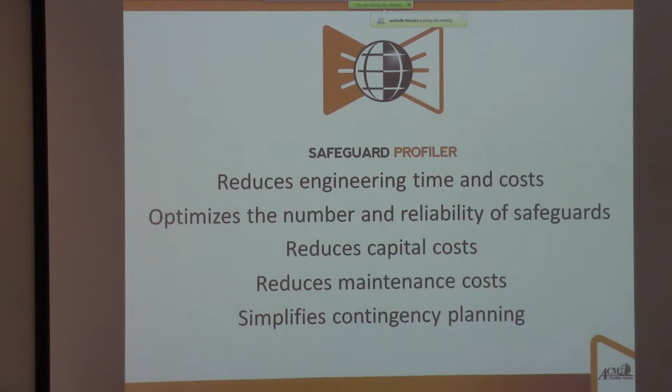SafeGuard Profiler is available in a few different packages. We've got the LoPA package, a SIL verification package, and an expert package. Today we're only really going to be talking about the layer of protection analysis side. It's a SIL determination step.

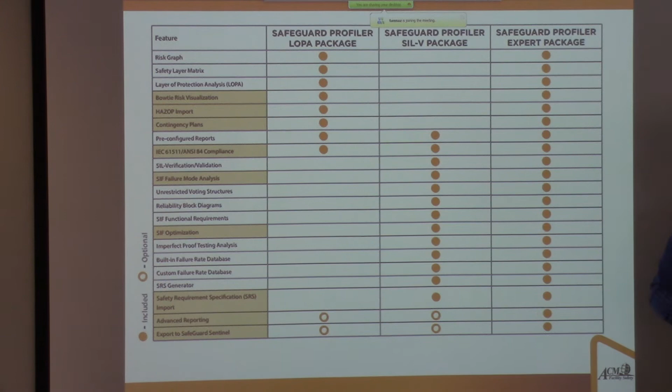So if we're talking about the layer of protection analysis and how we get there from the Hazop, what we're going to do here is set the stage and look at an example that hopefully most of us can relate to, which is a crude distillation unit. I'm going to walk you through what we would actually do in a Hazop. Most of you have participated, but a little bit of a reminder so that we're really setting the stage for this LoPA.

I'm then going to introduce what LoPA is, what the concepts behind it are, and we're going to walk through that same Hazop with the LoPA and talk about risk visualization, which is one of the things Profiler really specializes in, to make the sessions easy to understand and clear, and make it clear what the importance of the session is for everyone involved. Ultimately, I'm going to show you how SafeGuard Profiler does things better than the software you may have used in the past for your LoPAs, whether that be spreadsheets or PHA Pro.

Actually, that's another good question. Those of you who have participated in LoPAs, how many of you know if it was done in PHA Pro? Hands? How about SafeGuard Profiler? None. Okay, well that's good. How about Excel? How many of you have done them in Excel? Any other tools? Yes, we haven't shown SIF Pro. SIF Pro, of course. We also have Thesis, Thesis, which I would not recommend for doing LoPA. Well, we'll be looking at a lot of those today to compare them to what you get, especially PHA Pro in particular.

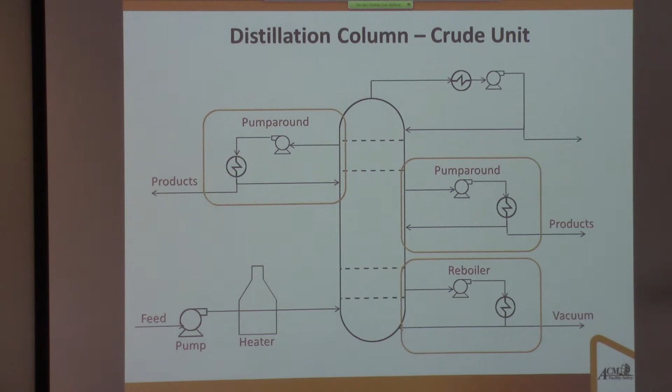And the way the crude unit works - it's a really simplified one - you have feed coming in, it's pumped through a heater to get it nice and hot, at which point it goes up the column. At the bottom here we have a reboiler, and that heats some of it up, sends it further back up, and draws some of it off as a vacuum feed for further processing. Also going up the column are various pump arounds that help you make products you'd be familiar with: kerosene, gasoline, jet fuel. Depending on how many pump arounds they have, they can get different products out of it. And ultimately we have the overheads, the really light ends, the propanes, etc., that are going to come off at the top.

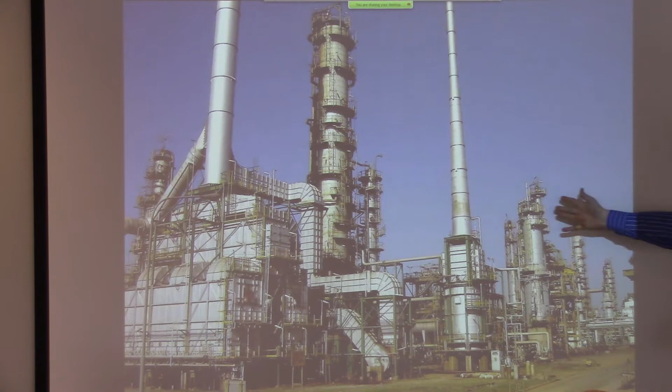So we have this nice, pretty crude unit. We've spent billions of dollars building it. And what we're looking at in the Hazop is what could actually go wrong. So we've got this crude unit - what's the worst thing that can happen? Anyone? Fire, explosion. Fire, explosion, that's a good one. Absolutely, it happens relatively often in industry that something goes really severely wrong with these and they blow up. What we're trying to do in the Hazop is identify that risk exists, identify what causes it, risk rank it, and identify what safeguards we have.

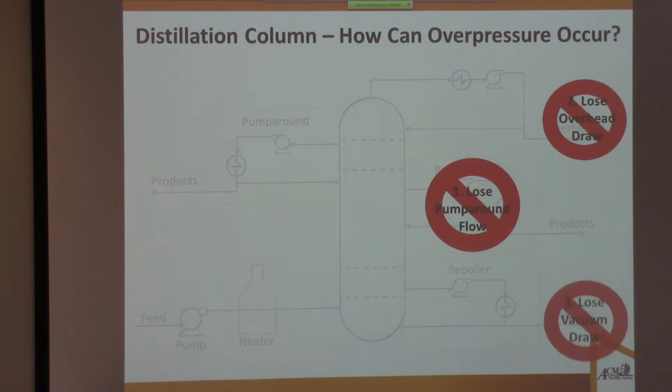So one way that we can blow this place up is overpressure. We're going to ask the team in the Hazop, all right, on this drawing that we're looking at, how can overpressure occur? Normally we're looking at very specific things like valves failing, equipment failing, operator issues, fatigue, etc. Some examples we have here that are pretty high level: things like losing your pump around flow can overpressure this thing, losing your overhead draw can overpressure it, losing your vacuum draw, losing temperature control in a pump around, and a line break in the reboiler. There's lots of different things that can all lead to the overpressure of this crude unit. We're trying to identify those here.

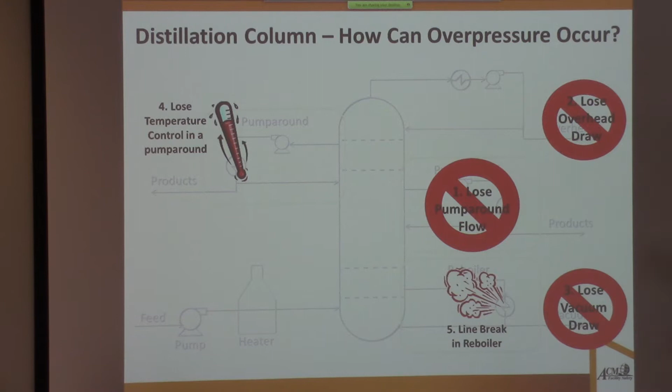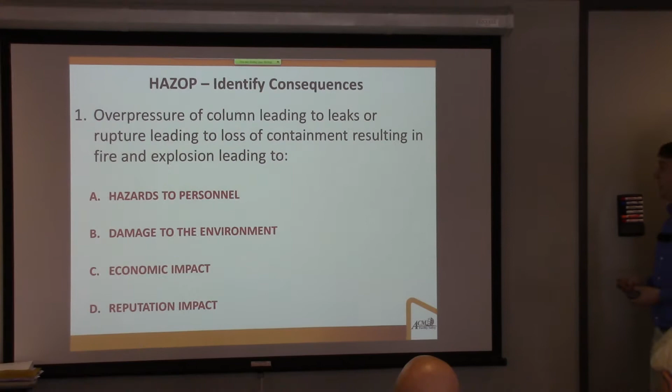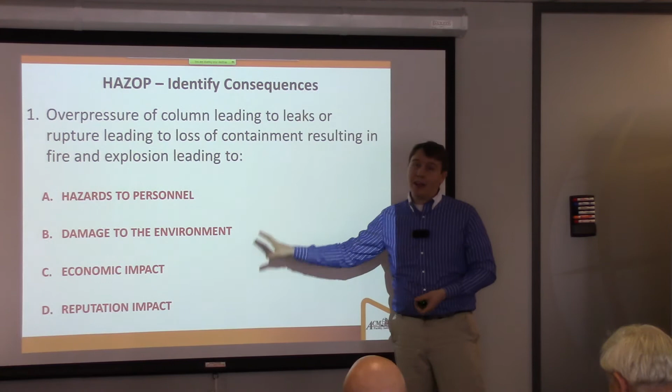Now, if I was going to walk you through a Hazop, we would actually go through each and every cause. But because we're limited on time and I want to talk about LoPA, let's look at just one of them: losing pump around flow. So we said that's going to cause overpressure, that's going to cause a fire and explosion. What is ultimately the consequence of that? There's various different impacts that can occur - ones we like to look at in particular: hazards to personnel, damage to the environment, economic impact, and reputation impact. They're fairly standard. Depending on what your company does, you may have more, you may have fewer, but really everything's going to fit into these types of categories. So we would be going through every cause, looking at this consequence, and then looking at each impact throughout it. Again, that would take a fair bit of time, so for now let's just look at hazards to personnel.

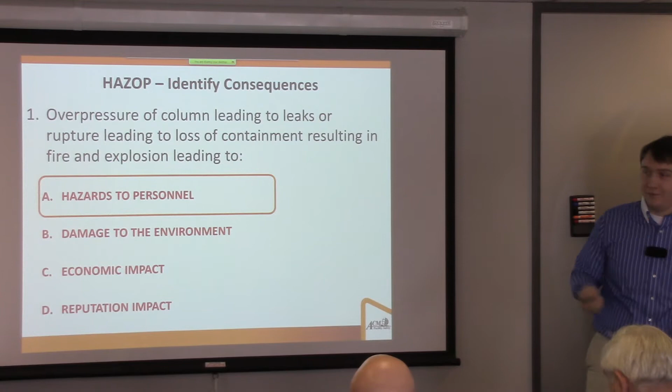So what happens if we blow up our crude unit? What happens to people? They get hurt. They do, absolutely. In particular, we want to quantify it to a certain extent here.

So to do that, we usually have a risk matrix. There's two sides to this. One, we always grab the likelihood of the cause, if at all possible. In this case, we were saying losing your pump around flow. We give that a value of 1 in 10 per year. So that's the vertical columns.

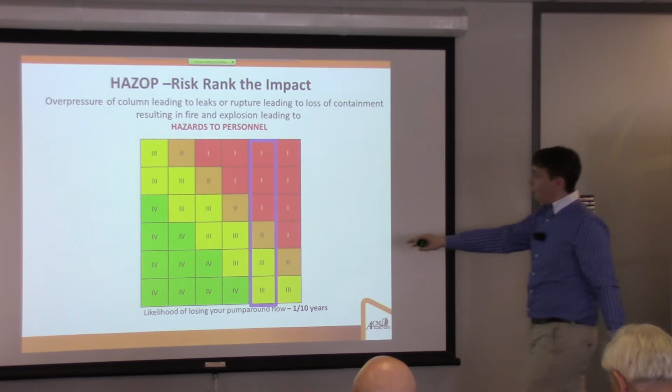And then we look at what is the actual impact to the people. Yes, they get hurt, but how bad? And the different levels represent different amounts. In this case, we're blowing up a crude unit. That's a pretty big deal. We're going to look at multiple fatalities. So that's the very top line.

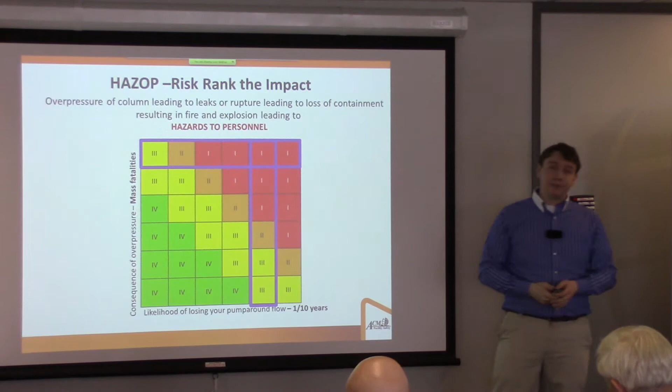Where these two intersect is what's known as our risk ranking. In this case, it makes an extreme risk. Red, quite high. And that makes sense. This event is pretty severe. It's pretty much one of the worst things that can happen within your refinery.

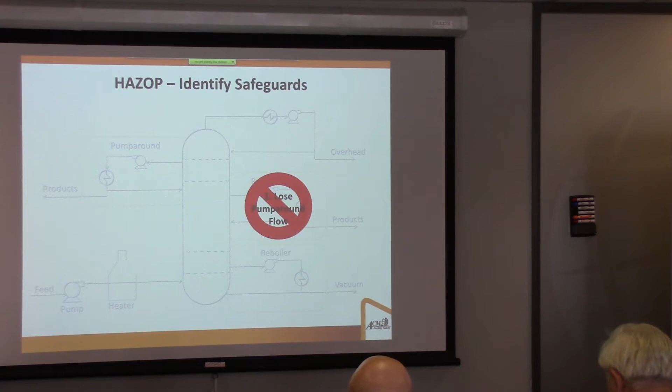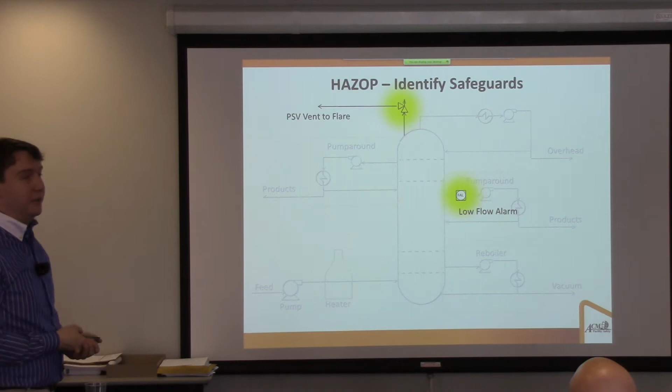So we've identified that risk. Okay, what do we have in place to actually lower that risk? So again, looking at just losing pump around flow with hazards to personnel, we have things like alarms. Everyone's got lots of alarms. In this case, a low flow alarm. And we have a pressure safety valve, vent to the flare. These things are pretty big on crude units.

And maybe we have a safety instrumented pressure trip on our heater to trip that and bring the system to a safe state. These are the type of things we would identify as being what we have to prevent that overpressure. So what does that look like?

A Hazop is traditionally stored in some sort of spreadsheet, whether that be Excel or PHA Pro in this case. But here we're looking at what we just did. We have one cause leading to a single consequence, which is hazards to personnel, a single risk ranking, and we have some safeguards identified. We even in this case have a recommendation saying this SIS will trip the heater. We need to figure out what the SIL rating for that particular SIS is.

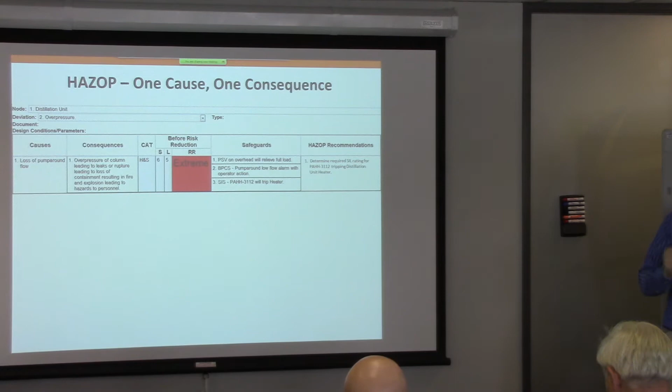Some people try to determine a SIL rating in a Hazop. That is not the place to do it. You should not be figuring out what your safety integrity level is on a safeguard in a Hazop. That can be a recommendation for later, for example, the LoPA stage or whatever you happen to do.

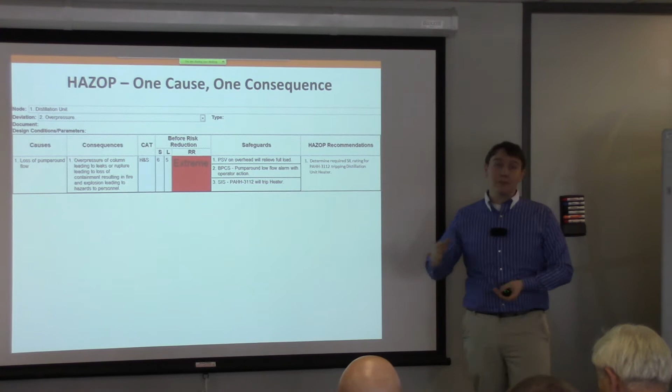So that was one consequence, the hazards to personnel, but we identified four earlier. We had hazards to personnel, economic impact, environmental impact, and reputation impact. So we're going to repeat the analysis for those four. This is still only one cause though, loss of pump around flow.

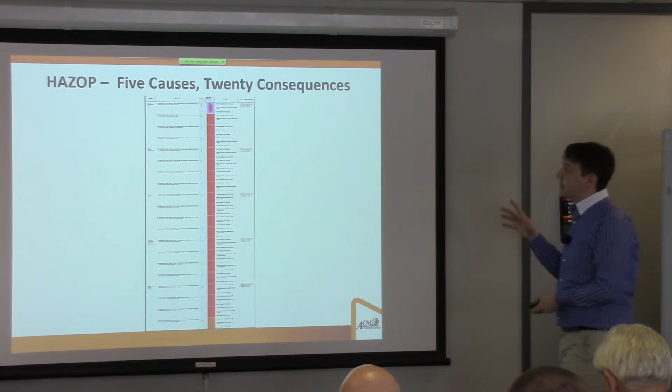This is just for a simple case of overpressure in a simplified crude unit. You can imagine what this turns into as you analyze your whole refinery, as you look at things like high level, low level, temperature. You're looking at hundreds of pages, thousands of pages of Hazop information. Again, it's really good at that engineering stage because you're identifying risks and you're making recommendations, but afterwards it becomes quite difficult to deal with all of this information.

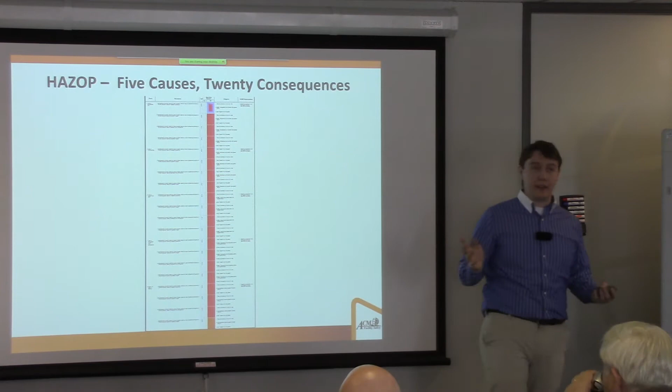And some of the things that a Hazop tries to do but doesn't necessarily answer, for example, where's the risk now? So we identified we have this extreme risk, and by identifying safeguards we've changed the likelihood of this overpressure, but we don't really know by how much. Hazop doesn't tell you that. So you can't get your proper risk ranking. You can estimate it, but you can't get your proper risk ranking.

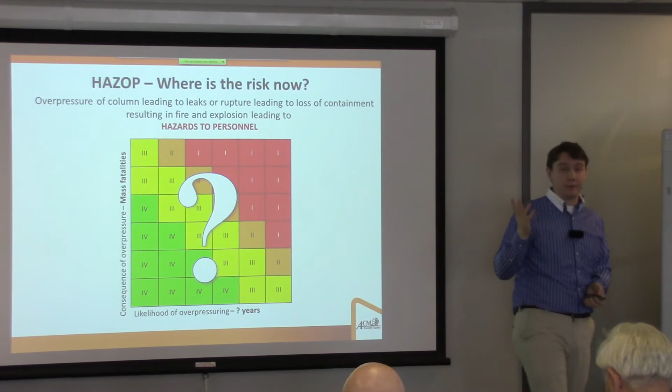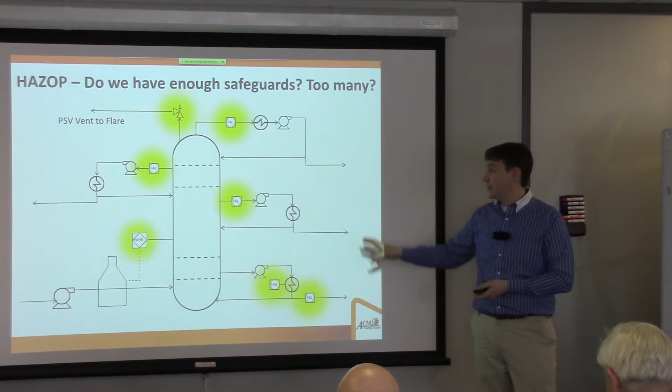So what about safeguards? I only walked through one particular cause, but we had a different alarm for every cause. How many safeguards do we have? Is that enough? We don't really know because we don't know whether our risk is low enough. Do we have too many? We really have no idea at that point. A Hazop tends to encourage looking at one cause and one consequence at a time, so you end up with a whole lot of alarms after a Hazop, as you can see from here. And out of that, you don't even know, are you safe yet?

What about this SIS safeguard? I said earlier, you can't get the safety integrity level for that SIS, so how reliable does it have to be? We don't know, because we don't know how safe we are yet.

How often does it need to be tested? None of that information is available from a Hazop. So to solve the issues with those, one of the things you can do is a layer of protection analysis, LoPA, which is what we're talking about here. The Center for Chemical Process Safety defines this as a process of evaluating the effectiveness of independent protection layers in reducing the likelihood or severity of an undesired event. Basically, we're looking at what safeguards we have and what the risk is afterwards.

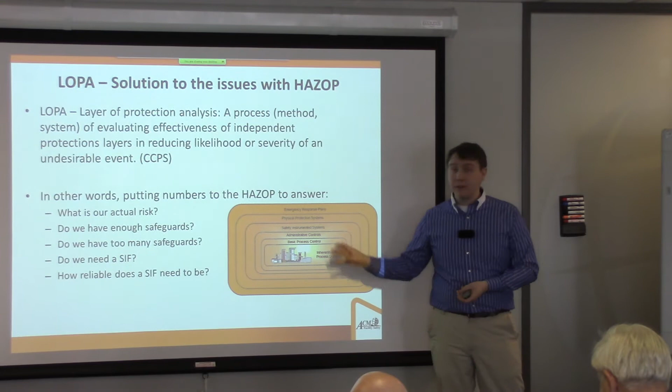It also answers things like, do we have enough safeguards? Do we have too many? Because the more safeguards you have, the harder the plant is to operate, and the higher risk there is long term. It's also a SIL determination method. That means out of it you can figure out your SIS safeguards, what reliability they have to be, and how often you have to test that. That kind of thing comes out of the layer of protection analysis.

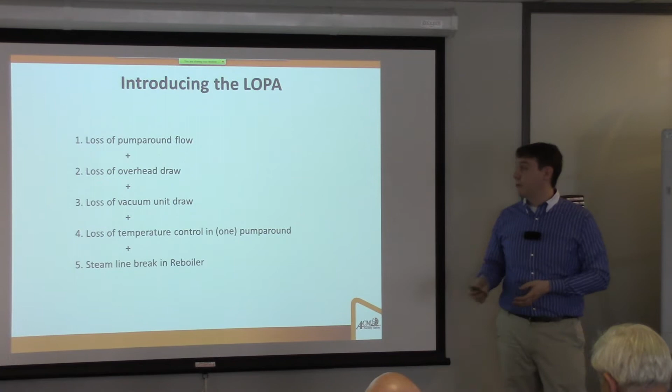So now I'm going to walk you through that same Hazop stuff that we just did, but in LoPA form. One of the differences in layer of protection analysis is we look at the various different causes that can lead to one case. So before we split out 5 different causes, we're going to combine all those together and look at everything leading to overpressure.

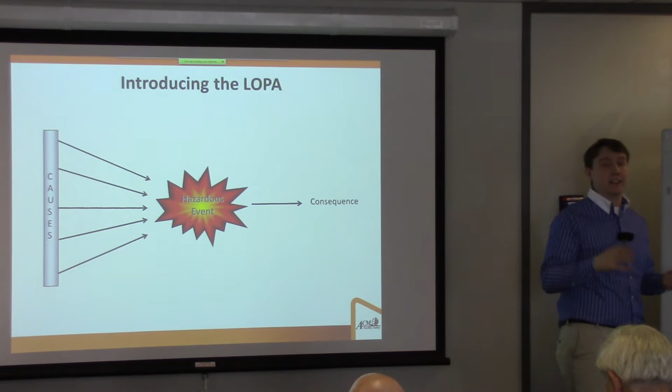This does not mean that we can completely ignore that there are separate causes. We need to make sure that every safeguard we have either applies to all of the causes, or each cause has enough protection that overall this multiple fatalities event happens fairly rarely. But if I want to look at this generally, the overpressure of the column and fire explosion is your hazardous event, and things like health and safety impacts are going to be your consequences. So generally we get this kind of setup: lots of causes leading to one hazardous event, leading to a single consequence.

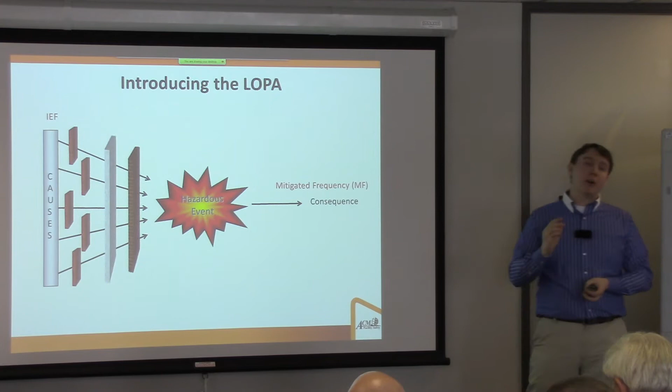When we add all of our frequencies together, we get what's called a mitigated frequency, or MF. This is how often the consequence is going to happen, or what the probability is in a given year that the consequence is going to happen.

What you're ultimately trying to do with your layer of protection analysis is make sure that your mitigated frequency is less than your tolerable frequency, or TF. Lots of acronyms in LOPA. The tolerable frequency comes from a variety of sources. Ultimately, it's how often society accepts these particular events. You can never reduce risk to a 0 level, but you can look at, as a whole, how often events can happen before basically you have public backlash and things change.

In reality, the tolerable frequency is going to be defined on a company-by-company basis, at least if you're in North America. There are some countries in the world that specifically define tolerable frequencies, but that's not North America.

What are some tolerable frequencies that exist out there for everyday life? We drive every day, and we know there's risks associated with that. The tolerable frequency currently for driving is somewhere around 1 in 10,000 per year. We use a similar number for fatalities within the workplace. It's fairly low, but it could be lower.

Make no mistake there, the airline industry, for example, we do our LOPAs to 1 in 10,000. They're looking at 1 in a million to 1 in 10 million, so they're around 1,000 times safer than we are. There's definitely room for improvement, but your company will have a defined tolerable frequency, and that's on a per consequence basis.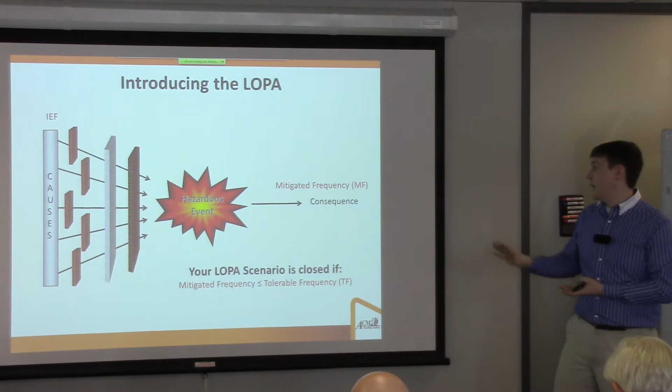So we have these initiating event frequencies, and we can add them together to get a mitigated frequency, but chances are that's going to be higher than your tolerable frequency. So that's why we have these safeguards.

Each safeguard has a probability of failure on demand, or risk reduction. This is representing that the safeguard won't always work. Alarms may not always come in, or they may not be acted on. PSVs may not always lift, and even SIS may not always activate. There's a certain chance that when you need it, it's not going to work.

And that's the reason why we have multiple layers of protection. If every safeguard worked 100% of the time, we would only be looking at one safeguard in any particular scenario.

So the mitigated frequency actually ends up being the initiating event frequencies multiplied by the PFDs on each line and summed together. We add safeguards, or improve the reliability of safeguards that we have, until such point as we meet this criteria: the mitigated frequency be less than or equal to the tolerable frequency. And that's the theoretical basis to what we're doing in a layer of protection analysis.

Of course, that's a fairly traditional approach, but we're only ever looking at one consequence. One of the things we have within SafeGuard Profiler is the bow tie, and it's a visualization of the layer of protection analysis that lets you do more work at once.

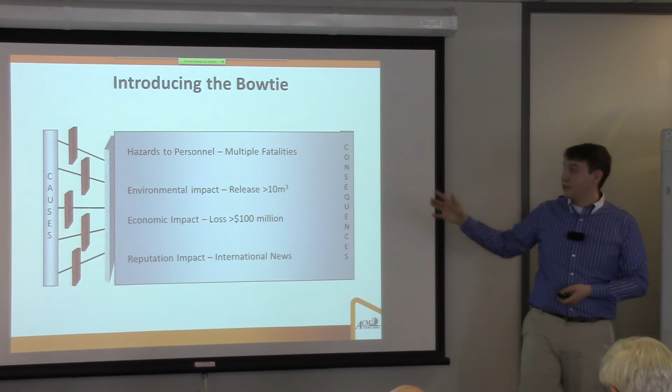So right now we're only looking at one consequence, but is there really any reason to only look at one consequence? We identified all the same causes, leading to a bunch of different consequences through the same hazardous event lines - hazard to personnel, environmental releases, economic impact, and international news. We can actually create a bow tie and analyze four times as many consequences at once.

A lot of people here have probably been involved in a bow tie analysis before, and it may be a little bit different than this, because in this case we're using it as a visualization for the layer of protection analysis process. There's such a thing as a bow tie analysis where you start by looking at certain events and building up the cause directly from the bow tie, and it's less quantitative than what we're doing.

Here we're doing all of the work of layer of protection analysis, all of that math that I just showed you, just making it easy to understand. And it really is quite easy to explain to a team what's going on here.

We have these different causes, these are the barriers, and you can see where there might be issues. If there's a line without any barriers, you should probably take a look at that.

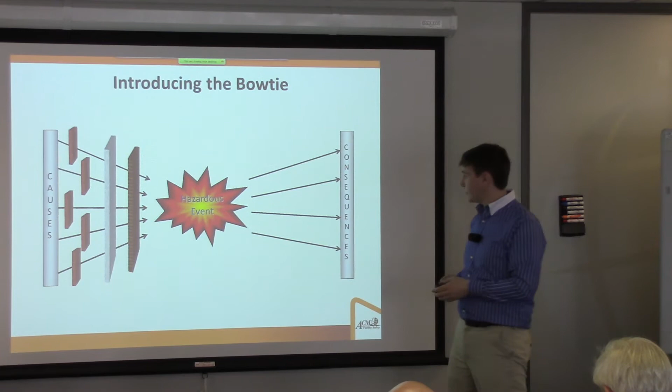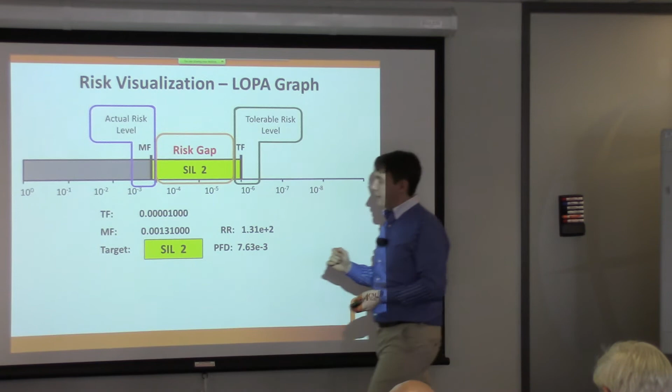The mitigated frequency is too high, so we show that as a risk gap. Using colors and simple words here, we explain what you would actually need your safety instrumented function to be - what reliability you would need it to have in order to reduce that risk and get the actual risk level to the tolerable risk. Simply shown using simple colors and the direct SIL level.

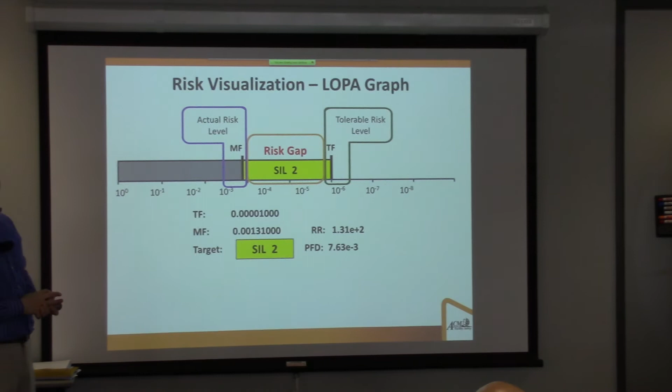Of course, there's some people in the room who want a little bit more of the numbers. The numbers people - I'm a number person - and we have all of those available within the LOPA graph as well. You can look at your exact mitigated frequency, you can look at the risk reduction that's required in the PFD. Everything's still shown there, still available if you want it.

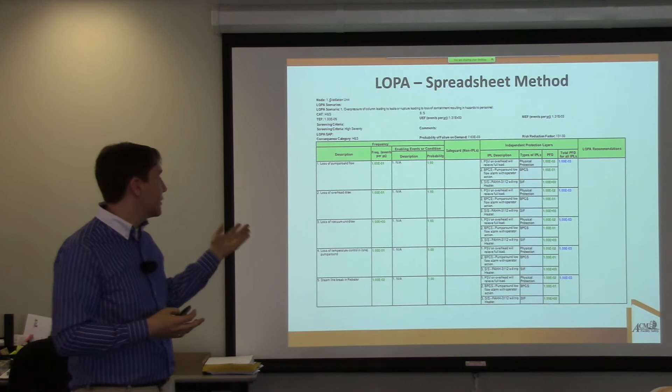Instead of looking at the bow tie, which I used to explain the concept because it's easy, let's look at what happens in a spreadsheet method that you guys might be more familiar with. If you've used PHA Pro, or you've used Excel, or even CIF Pro, you might be more familiar with something that looks kind of like this.

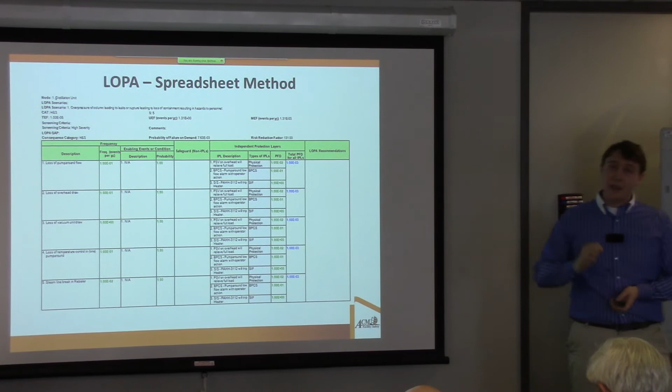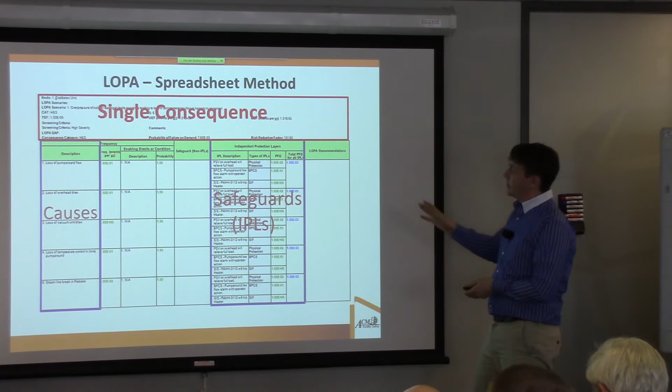Kind of looks a lot like a Hazop. And in this case, we're only looking at a single consequence, very traditional in that method. There's our causes listed, and here's our safeguards or IPLs. They have PFDs to them. We have our initiating event frequencies, and it's doing all the math there.

But I want to ask the questions that we asked at the end of the Hazop. Are we safe yet? I can't tell. Do we have enough safeguards? I don't know. Do we have too many safeguards? I don't know. And we have that safety instrument function - what reliability does it need to be? That's the first question that we can actually answer. The numbers there are little tiny.

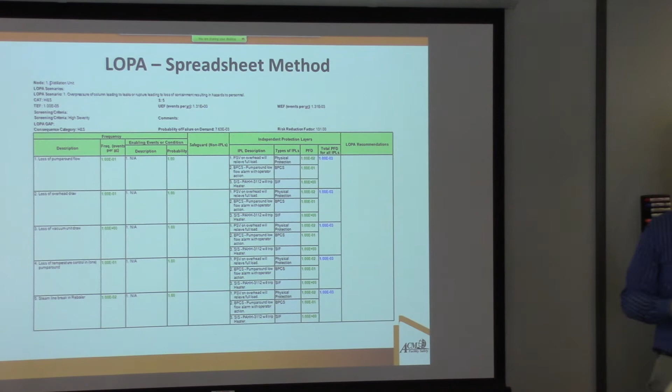There's a lot of information here, but not a lot of it is valuable to the people who are actually in the room doing a layer of protection analysis with you.

It's awfully scattered. Basically from that Hazop, we've looked at how can I prevent every single cause. But that's not necessarily what you want to do. What that leads to is way too many alarms. If we can look at what will actually prevent this overpressure, we can replace a whole bunch of alarms with a single alarm, a high pressure alarm, without impacting our overall risk level.

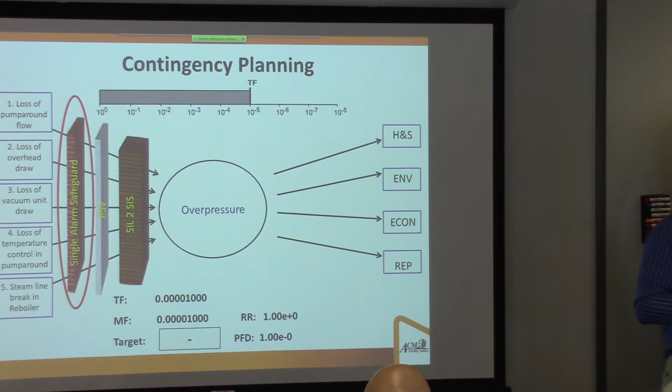Because before, if a single alarm didn't work, like if the instrument failed, you would only be losing some of your risk. Now you're losing a lot more. That single alarm has got to be independent from the initiator of the safety function. Absolutely, yeah. So you still need 2 transmitters.

You need 1 for the SIS and 1 for the alarm, but you don't need the 5 alarms you had earlier, right?

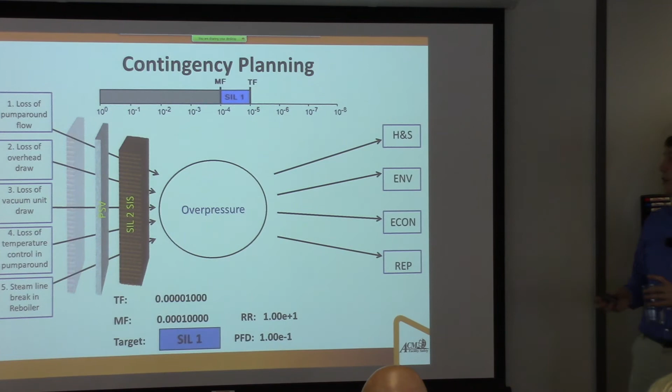What we can do within SafeGuard Profiler is actually look at these individual safeguards and say, what's going to happen if during operation something goes wrong and I don't have that safeguard available? It'll automatically generate what my new risk is without that safeguard. In this case, a SIL1 equivalent gap.

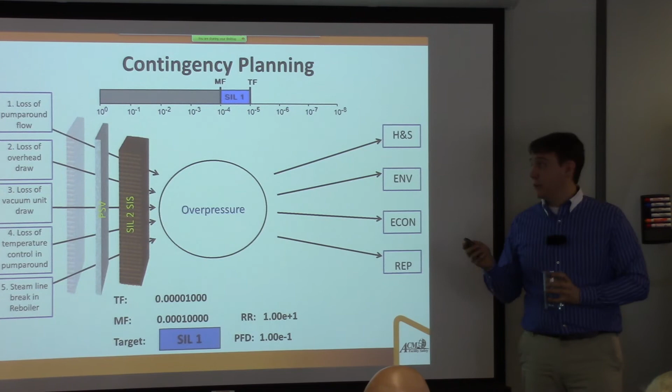So now we kind of have an idea of what we're looking at. We can also add in contingency plans, which let the operator know what to do to bring that risk down to an acceptable level. So we no longer have this alarm, but maybe our contingency can be to continue to run with increased operator observation of the column pressure. It's another safeguard that could work.

But the thing is, that safeguard's not as reliable as your alarm, because it depends on a lot more knowledge. So your reliability is a little lower, and Profiler has automatically calculated what my new risk is. And we have a slight gap still.

Because this is happening while you're operating, it's a little bit different than your design risk. You can run for short periods of time at slightly increased risk, but it needs to be a defined short period of time that's acceptable.

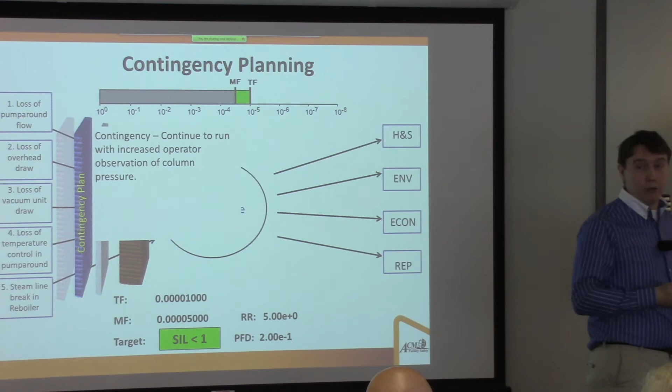So what we can do is say ahead of time, if we have a risk reduction of 5 remaining, we can run like that for maybe 24 hours. So now our contingency becomes: continue to run, observe the column pressure, and make sure that original alarm is reinstated within 24 hours. That's an acceptable amount of time to run at the slightly increased level of risk.

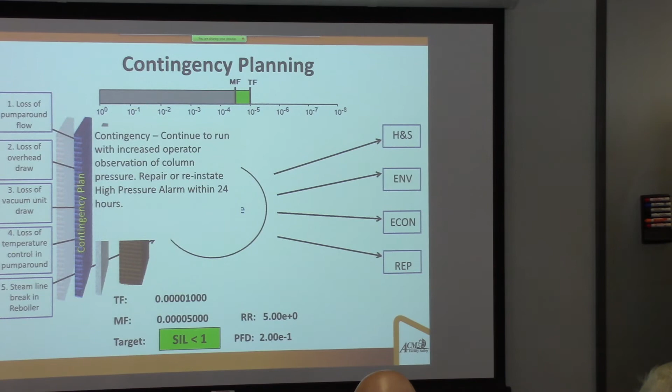So at the end of this, if you've done this analysis, your operator has a list of everything that can go wrong in terms of safeguarding within your facility, what the risk is when these things go wrong, what to do, and how long you can run like that. It gives a lot more information for the people who need to be operating this, and they're no longer operating blind.

So throughout this, what has SafeGuard Profiler done for you? We took this Hazop, we had a few pages of information, and we've put it on a bow tie. This is the exact same information, but here you can't read it, here you can.

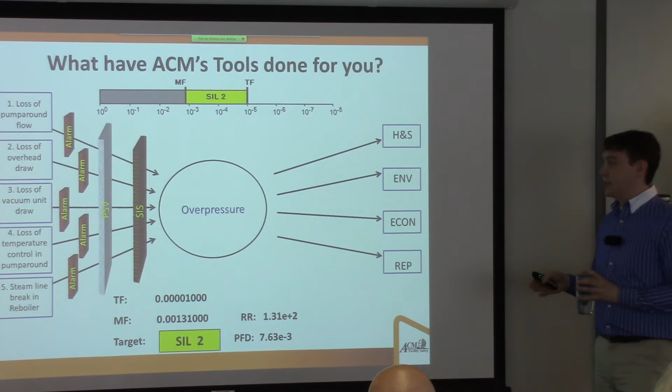We call this actually visual compression, which means you can fit 12 pages of Hazop on a single bow tie. So if you look across your plant, you're looking at only 50 to 100 bow ties, maybe for a really large facility, versus thousands of pages of information.

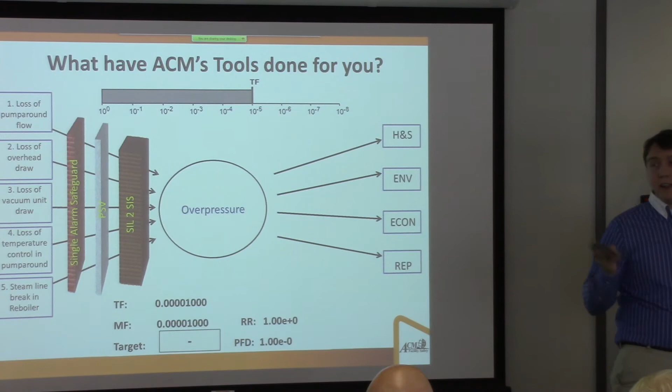SafeGuard Profiler also guided you through simplifying your system, reducing the number of alarms you have in this particular case, and figuring out what your SIL, safety instrumented function, reliability needed to be. You know you need a SIL 2.

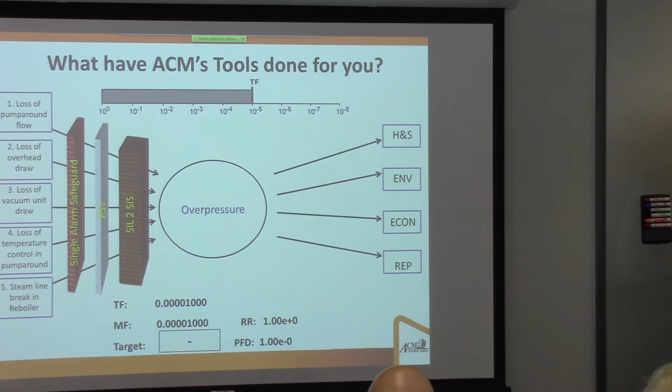What I haven't really touched on today, and I mentioned earlier that this is a separate lunch and learn, Profiler can actually then help you design that SIL 2 SIS and do your verification, do your safety requirement specification, optimize your test intervals so that you don't need to test as often, all within the same project that you're looking at. So it's just a click away, you can look at all the information you need for that particular SIS.

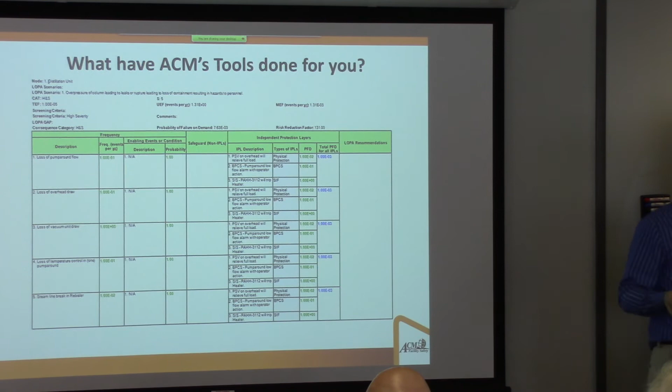Compare this to a spreadsheet where you have a whole lot of information that you can't really understand, people in the room can't understand, and has no information about that safety instrumented function within it. Compare that to this nice, simple bow tie presentation that's available.

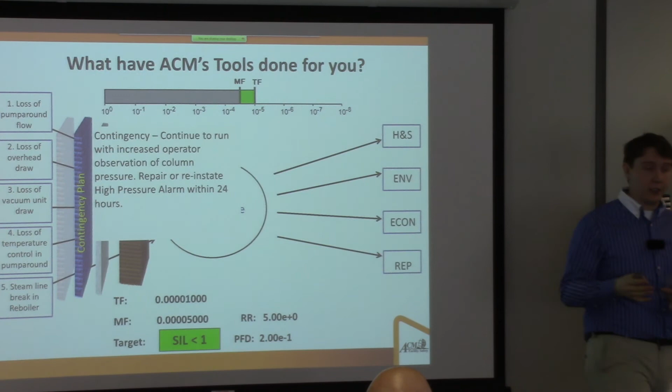You also have contingency plans. So for every safeguard you identified in your Hazop or your layer of protection analysis, you know what the risk is without it and what you can do in place of that. So your operators have that manual and can run your plant for the 25-year, 35-year life cycle at a much safer state.

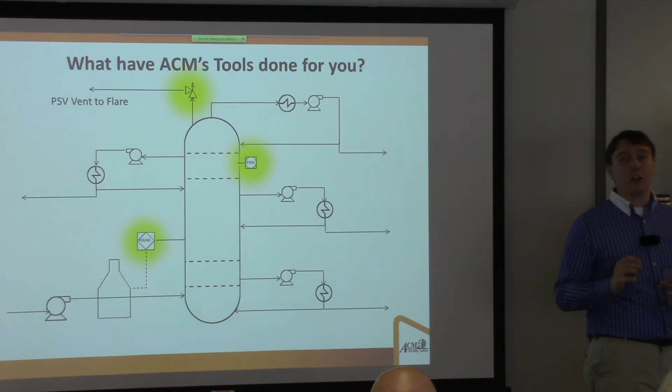And ultimately, the coolest thing here, we started out from the Hazop with a total of 7 safeguards, a whole bunch of alarms. We took a bunch of them out and replaced them with 1. We're down to just 3. So again, if you can just remove one of them, the capital and operating costs over the lifetime of your facility will really astound you if you look at it.

So how has this actually been applied in real life? It's nice to see it here.

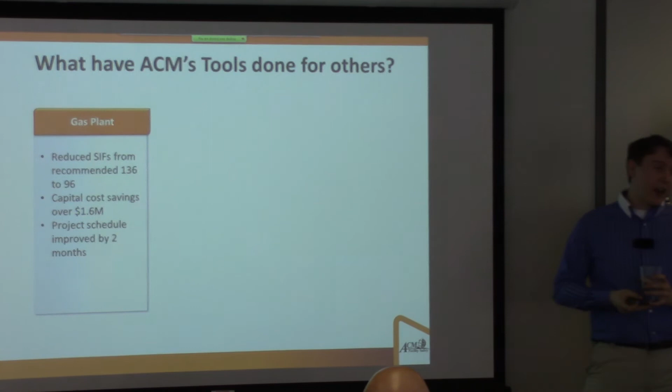I've been talking mostly about reducing your alarms, but you can actually do the exact same analysis with safety instrumented functions, because they are relatively expensive to put in, and they're often thrown in by the design team as, simple. We're going to need this as a safety function, let's put it in.

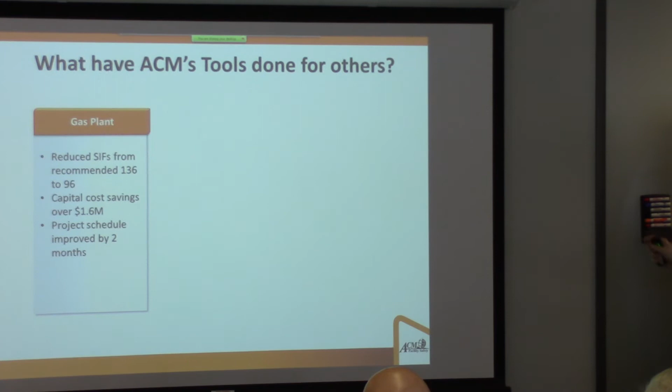A particular gas plant here, out of the Hazop and the design stage, there were 136 recommended safety instrumented functions that needed to be built and maintained for the life cycle. By using the bow tie analysis, that was reduced to 96. The capital cost savings, $1.6 million. The operational cost savings are orders of magnitude larger than that. And ultimately, the project schedule improved by 2 months just by using the bow tie and SafeGuard Profiler.

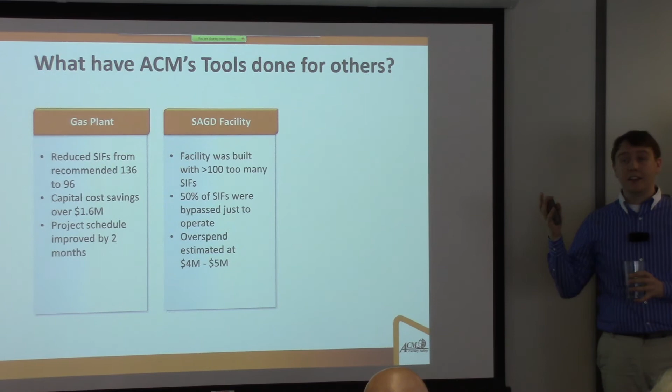We had a SAGD facility. We didn't quite get to them early enough, unfortunately. They'd already built it. They were operating. They estimated that they had over 100 too many safety instrumented functions. Over 50% of the SIFs were bypassed just to operate. They had to turn off all their safety that they'd calculated before. The capital cost overspend was $4 to $5 million, and again, the operational cost of the time that they were trying to get this started up was just huge. Ultimately, they were able to reduce the number of SIFs they needed and prove that they could still run safe by changing how they operated and looking at a bow tie.

Another one, an upgrader here, 74 SIFs needed according to the Hazop, the Safety Instrumented Functions. Once you went through the LoPA and actually did some analysis on the mitigated frequency versus the tolerable frequency, 53 were needed. And again, the capital cost savings on just that was $1 million, and operational cost huge for safety instrumented functions.

So, how can you guys get involved in this? We have a variety of training and certification courses.

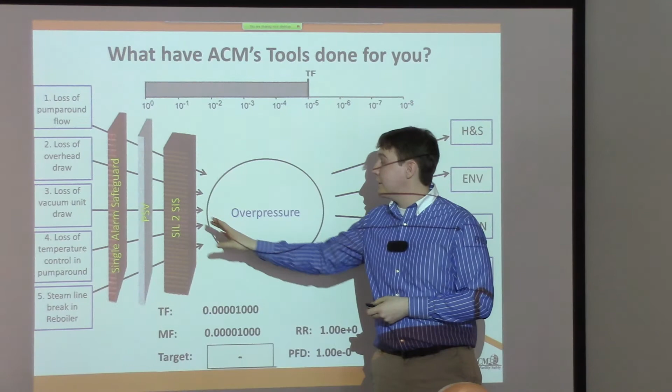I'm going to go to another question here. All of the safeguards you spoke about were preventative measures. You've got mitigative measures too, like fire detection. Does that work in exactly the same way? Do you use the same tolerable frequency? The question was, we talked about preventative safeguards on the left side of the bow tie, but didn't really talk about mitigative except a brief mention of fire and gas earlier. That was because our example was so extreme, but ultimately the math works the exact same way for mitigation safeguards. The difference is they'll often only impact some of the right-hand side cases. So fire and gas might only help with economic impact, for example—if someone's in the area, they're still going to get impacted. So you'd see a safeguard on the right side just covering that, but the calculation ends up being the same.

So that tolerable frequency is actually a measure of risk as opposed to frequency, really? Measure of risk—the two are correlated as long as the consequences are the same. In reality, there's a different tolerable frequency for each consequence, and it's shown that way within the software. It's simplified here for style, and I can show you that in the software afterwards. But you're right, in that case your numbers for each of these would be slightly different. We have an easy way to explain that—we actually show the LoPA graph in place of each of those texts on the right.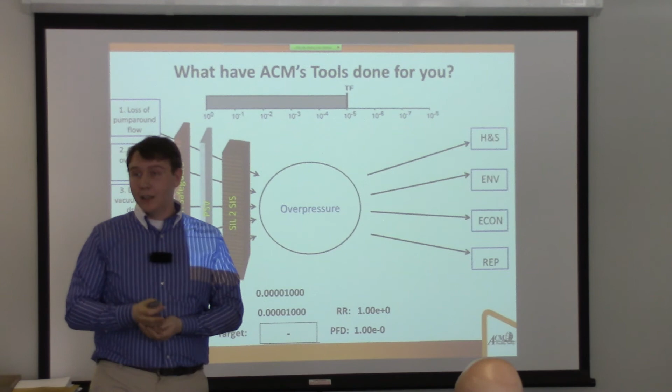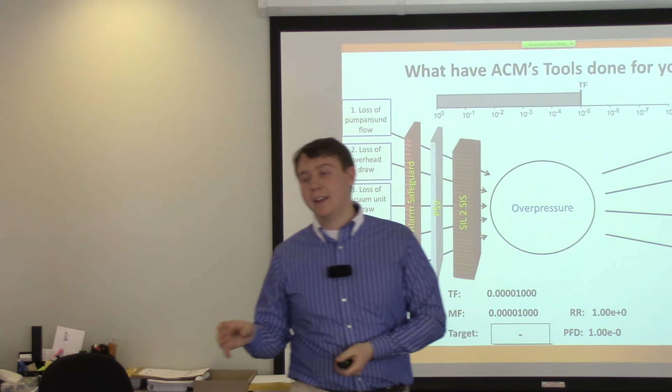Great, thank you. Yes? Now, we design all this, you build the plant and the plant is running. So from the operations side, how do we know at any particular time that the validation is all complete and we are complying with this? Does this product do that? That's a good question, let me reword that—basically this is great at the design stage, but once you get into operation, how do you know that this work has all been done? Is that your question? This has been implemented already—so at that time, if we don't do real-time testing, partial stroking, and everything, whenever management asks 'are we safe?', can we say okay, we are safe or not safe, and how safe we are? Does this do that?

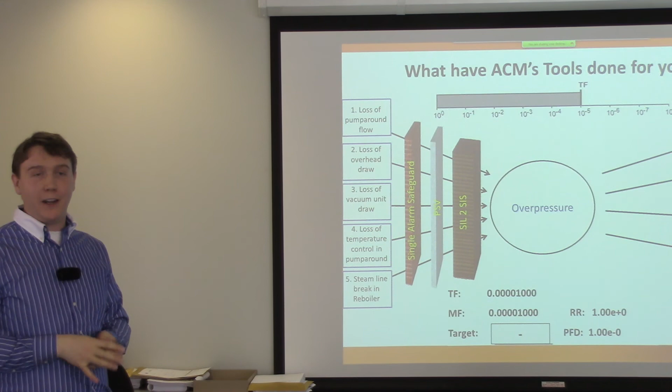SafeGuard Profiler is not the tool for that—it is an engineering design tool. What we have is SafeGuard Sentinel that actually does that calculation in real time. To repeat the question for everyone on WebEx too: does this work in real time to say what my risk is once I'm operating? The answer there is no. SafeGuard Sentinel, which all of you have a brochure for—the blue one—does exactly that, and that's a future lunch and learn. If you'd like to learn about that, talk to me, Brad, Tom, or even email software@acm.ca. We'd love to talk to you guys about that tool, because it's a pretty cool tool as well.

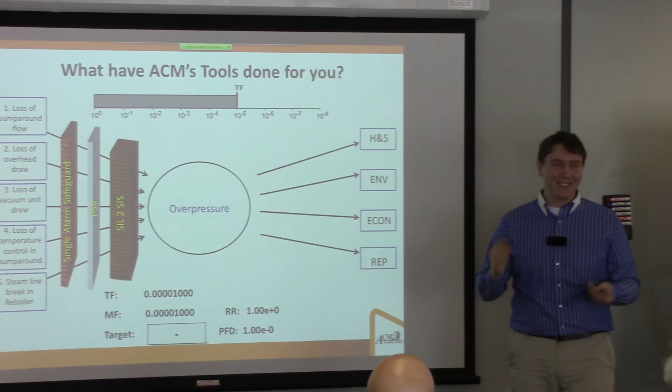Yes, Robin. When you reduced all those alarms into a single alarm, is there an implicit assumption that the action you take upon alarm is the same, regardless of what kind of alarm? Because they were different alarms, right, different services. So is there some implicit assumption that when an alarm comes in, the action is the same regardless of which alarm?

So the question there was, we replaced a whole bunch of alarms that had different detection, and they also may have had different actions. Now we've replaced them with a single alarm - does it have just one action or multiple? That's ultimately going to depend on what you're doing. The LoPA usually looks at the alarm as two parts - it's not just an alarm, it's actually the alarm with operator action. What that action is, you can define in the software, but usually you're looking at your alarm manuals to say what we're going to do. The operator needs enough time to react to the alarm for it to be valid, enough time to do a little bit of diagnostics - if you see the high pressure, look at your flow through each of these, your temperatures, etc. That's the steps they're going to take.

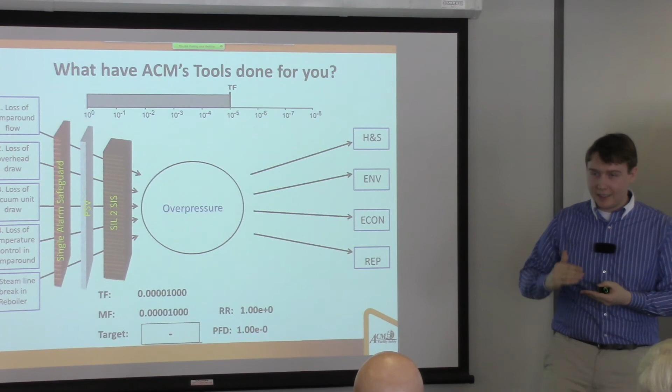When we talk about alarms, some of them you're trying to make high priority or urgent priority. Does that have to be on the safety system, or how robust does the alarm system have to be? Do we have to have a panel-mounted one?

So the question is, when we're talking about alarms, how reliable do they need to be, and what system do they need to be in? Are they supposed to be in the safety system? Because mostly we're using an HMI, right - that's a DCS HMI, and they are not very robust. So how do you handle that?

What's going to change is the probability of failure on demand you can give to a single alarm, depending on what system it's in. Included in that probability of failure is the probability that the operator doesn't see it or doesn't act on it. That's going to change depending on your own systems within your company. There's some guidance for how to calculate that coming out from the CCPS this year, but there's plenty of documentation available for figuring out what PFD to choose for an alarm. You may choose a higher reliability, or lower PFD, for something you consider quite reliable that the operator always acts on.

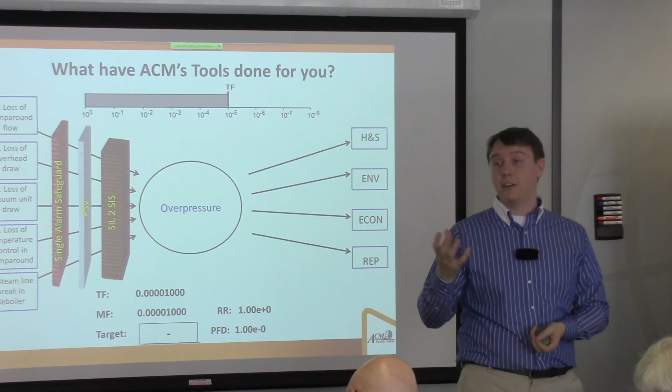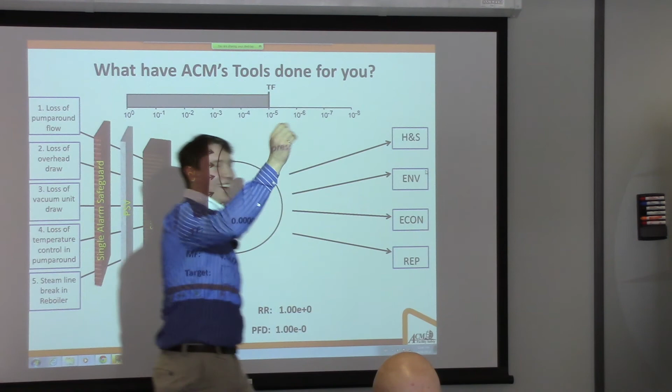Okay, I'm just going to check here whether there's any questions on the WebEx. I don't have any. Okay, so more, yes. I have a couple of questions. Okay, throw them your way.

Since you're talking about alarms, as you just rightly pointed out, an alarm by itself is not a full barrier - you need an operator intervention, you need the operator to be able to do something. So do you have the capability or prompt within SafeGuard Profiler to query about validity of barriers? And if you don't have a fully valid barrier, or you have a couple that aren't fully valid, do you have any provision for combining them? That is ultimately the job of the facilitator - to say, is this alarm actually valid, and is it going to work? Unfortunately, there's no way for software to tell that, because the software doesn't know whether an alarm will actually work. So we don't prompt for that, since it would be a continuous prompt. We do depend on the facilitator in that case to do some prompting.

One more question: do you have the ability to handle ALARP, as low as reasonably practicable? So in addition to meeting some tolerability criteria, you go beyond and say, what else could I add that would bring the risk lower without undue cost? Okay, I'm going to repeat that question - do we allow you to get a higher safety than the tolerable frequency if it's as low as reasonably practicable? So if it's really cheap to do, can we add more safety?

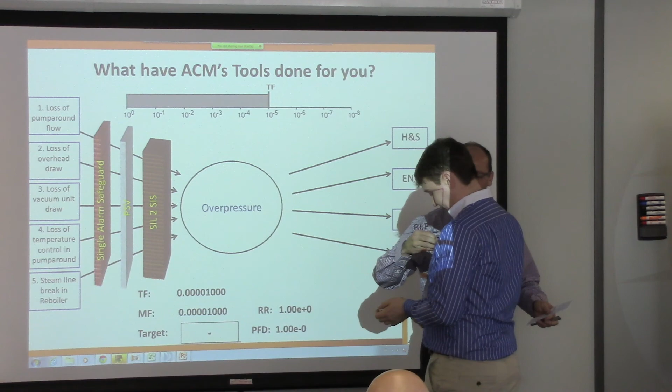Thanks, Patrick. Don't go too far, I got the microphone. Either stay here with me or there we go. All right, thank you very much for joining us. Big round of applause for Patrick. I think you did a great job.

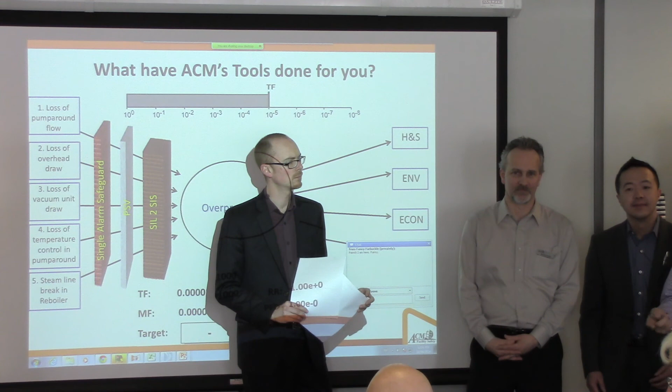We've got some great events coming up. These lunch and learns go on almost every month, sometimes a couple times a month. On May 8th, we actually have Ian Sutton coming to Calgary, hosting an evening talking about the state of the process safety industry and how it's not dissimilar from the aviation industry and other industries out there.

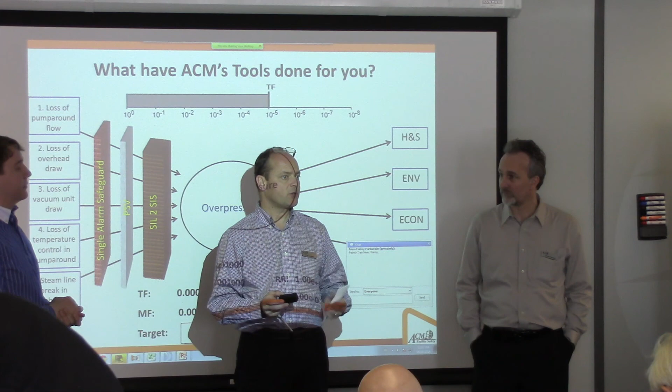Yep, and the team is going to be around later on, so if you want to grab us on the way out, we're available. Okay, thanks Brad, thanks for coming. Thank you guys. Yep. Can I borrow a pen?